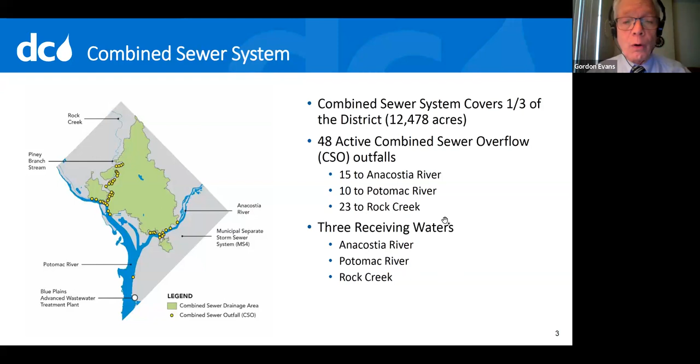That's an old style sewer, but that's exactly where the problem is that we're having to address here, because these combined sewers have overflows into these waterways, and these overflows carry untreated wastewater during wet weather events. So these are all being addressed in this project. We know there are about 48 of those overflow points in DC, and we're going to try to mitigate all of them as their flow goes into these 3 receiving waters.

This slide shows an illustration of the conditions on the Anacostia River before we started putting a CSO tunnel along the Anacostia. On the top, on the right side, you see one photograph that is a CSO discharge. That's a combined sewer overflow discharge to the Anacostia River. This is during a wet weather event. And down below is an example of trash on the Anacostia River. That's floating trash. That might be bottles, cans, anything that gets swept into the storm system and gathers here.

And so I'm going to guess that we've got maybe 88 people signed on here. If all those 88 people could look back on your experiences, I'm sure all of you at one time or another have used a garbage bag and cleaned up debris on the side of a river. And so imagine yourselves, all 88 of you, cleaning up this amount of debris that is shown here, and it's quite a large volume. And if you filled up all your garbage bags, that might be 100 or 200 pounds of floating debris that you would get in your garbage bags, and you would save it from going down the Anacostia into the Chesapeake Bay.

The reason I'm pointing this out is to compare it to another gathering of this kind of floatable debris later, an automatic method that we've got. We'll talk about that later. The upper left side of this slide shows 2 examples of combined sewer systems. The upper left is a sewer system during dry conditions, and the sewage is shown in brown, going its normal path out of a building into a sewer, and then being diverted to the Blue Plains wastewater treatment plant. That's normal flow during dry conditions.

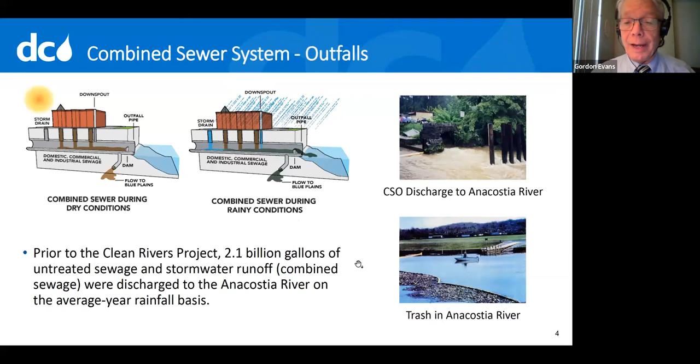Okay, that's slide 4. We're going to move to slide 5. So these are some examples of flooding that were recorded. Many of these are along Rhode Island Avenue, a very old and busy and important thoroughfare through DC. And you can see that we've had severe street flooding in that area, so much that some of these cars are nearly half covered. And so this is part of the situation that will be alleviated by this tunnel system. But again, Rhode Island Avenue, we're going to look at a map of where this is located and what's happening to try to mitigate this.

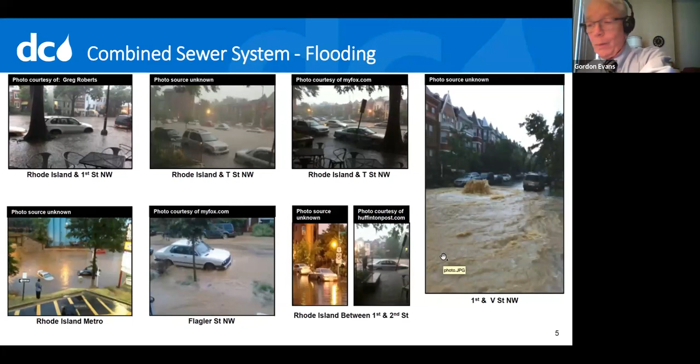Okay, moving on to slide 6. And here we've got another map of the district shown on the right. It's another rectangle, and it has, again, on the left, the Potomac River. That's the big blue line on the left. On the right side is the tributary of the Anacostia River, and along these rivers right now are an orange line, a purple line, and a yellow line. The purple line is a portion of the sewer that has been in place since 2018. It's called the Anacostia River Tunnel.

The orange line is the Northeast Boundary Tunnel. That's the portion that is just about ready to go online. We'll be talking about that specifically later. And then on the left side, the yellow line is the Potomac River Tunnel. That's the one where construction hasn't started yet, but it's coming. So these are the 3 main objects of our program here.

Also on that same map, in the upper center, is a bright yellow area with orange spots. That's the areas where green infrastructure is being used to mitigate some of the excess stormwater flow. That's not going to be the focus of this presentation. We're looking at tunneling only, but that is an important component of dealing with stormwater runoff here in DC.

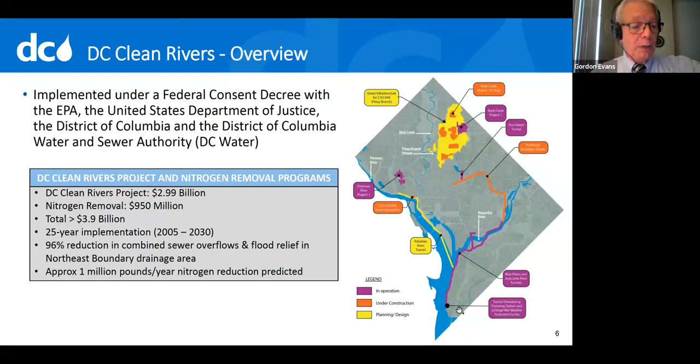Looking at slide 7, this is maybe a type of drawing you may have never seen before. This is a profile of ground. The tan color is the ground surface. It goes up, it goes down, and then down below is a depiction, a cross-sectional view of our tunnel. The portion on the left is colored in purple. That's the portion that has been in service since about 2018, and the portion on the right is in a tan color, and it is the next segment that's going to go in service in 2023. You can see that there's a slope in this tunnel from right to left, and that's by design.

When tunneling engineers, sewer engineers put these in place, they try to get a certain slope, which then renders a certain flow velocity. As the flow goes through here, that flow velocity, if it's high enough, will pick up all the debris in the invert of the sewer and carry it to the plant. So that's a kind of a self-cleaning mechanism that the engineers try to design into this.

Also in this profile are two dotted lines, one kind of in the center, and that's one dotted line that depicts 157 million gallons of storage. That's the requirement of the consent decree. And as soon as we get Northeast Boundary Tunnel online, we will achieve that. Above that line is a second line. It represents almost 200 million gallons of storage. And after this is all finished, that's kind of bonus capacity we feel we'll have in place. So we will have well more volume stored than we were obligated to have in the consent decree.

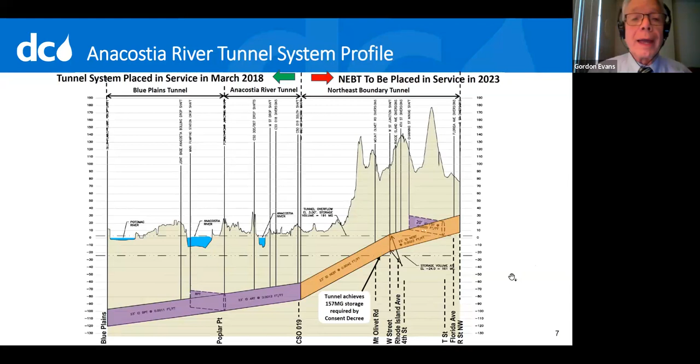Okay, moving to the next slide, which is slide 8. This is a slide kind of colorful with a graph in red and green colors, and what each one depicts is the amount of flow that our tunnel system saw in these various years. And in 2018, that's the first flow that our installed tunnel system saw. We got a huge amount of flow. That bar graph is up to 60.1 inches. That's way more rainfall than was expected.

And then the red and green colors depict: the green portion is the portion that was captured by the tunnel, but it was more flow than the tunnel could handle, so it overflowed, and that's what the red portion is. But you can see a minority of flow did overflow, and that was the case in every one of these years, 18, 19, 20, 21, 22, 23. The majority of the flow is being captured in the tunnel system, and a minority of it is being discharged untreated in overflow.

And then the bullet points on the left, these get to something we were talking about before. The first bullet: over 15 billion gallons of combined sewage has been captured between March 2018 to July 2023, a huge amount. Now the second bullet here, this relates to what we were talking about in the beginning. If all 88 of us were out with our garbage bags cleaning up trash along the river, we might gather 200 pounds of debris.

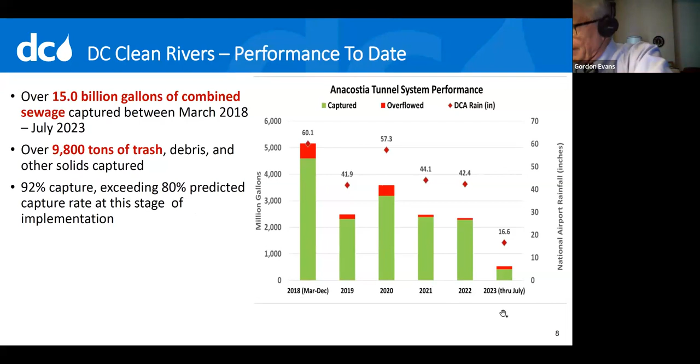Okay. All right, moving on to the next one, slide 9. Here's another map, this time of the Northeast Boundary Tunnel. That's what we're going to talk about specifically. The blue body of water on the right is the Anacostia River, and the portion that's along here is about where RFK Stadium is, if any of you kind of remember where along the Anacostia that is. And this brown line here is the path of the Northeast Boundary Tunnel, and the upper portion of it, the diagonal portion, parallels Rhode Island Avenue. Remember, we saw those photographs of flooding along Rhode Island Avenue.

Each one of these red dots or circles represents a diversion structure, and that enables the surface water to be diverted into this very deep tunnel system, might be 50 to 120 feet below the ground, and gets it off the streets. That's the whole purpose of this tunnel system. So you can see we've got several of these diversion facilities along, especially Rhode Island Avenue, and then other places.

Down in the bottom left is a small detail of what a diversion structure looks like. We'll look at a bigger version of it later, but in essence, it's got the tunnel, which is down below 100 feet below the ground, and then above on the surface is the diversion structure that sits astraddle an existing sewer, and whenever that sewer gets too full, the flow is diverted and drops down a shaft and goes into that tunnel system.

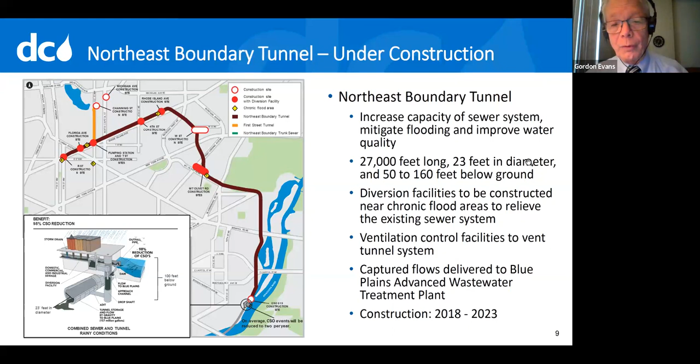Okay, moving to slide number 10. This is a typical construction site. And in the bottom right-hand corner, you can see how crowded it is trying to build anything inside crowded DC. So this contractor has a triangular shape here. He's crammed everything possible into it.

And then after construction, you can see the depictions on the upper right of what this site will look like when he's finished. It will be a very welcoming park setting, and so the people in the community will probably have no idea what's down below, but they'll appreciate this triangular park they've got. On the left side is a plan view of a typical facility. You can see the aqua colored sewer coming in from the upper right.

It intersects a circle in the middle of the site. That circle is the shaft that may be 50 to 160 feet deep, hits the shaft, and then adjacent to this structure is the diversion facility. That's the rectangular feature on the bottom. It sits astraddle the green sewer line. And then at the hypotenuse of this triangle is the ventilation control facility. That's the one that lets the air exhaust out of the sewer as it's filling up.

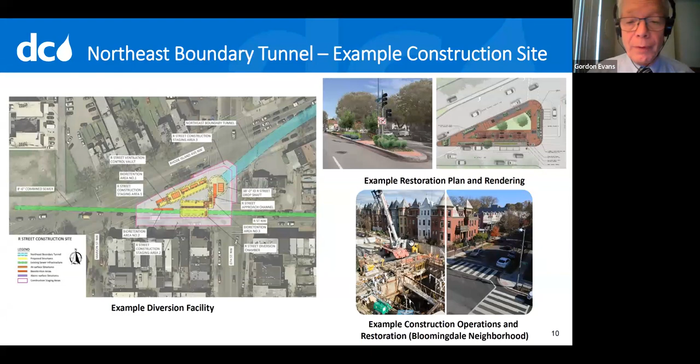Okay, moving to slide 11. Here you see more detail of a typical diversion facility. You see the tunnel down below, and then up above, you see the diversion facility sitting over the top of a sewer. And whenever the sewer gets full, the flow is diverted down a shaft and into that tunnel.

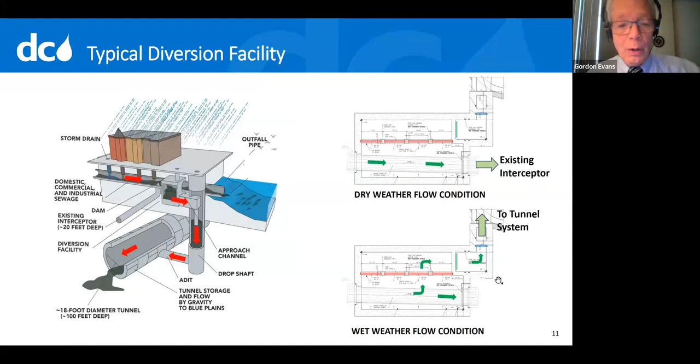On the right side, you can see two details of what one of these structures looks like during dry weather. The flow goes straight through the green arrows there. And then during wet weather, the flow gets so much that it fills up and it crosses this red line here, which is a weir, and that's kind of the boundary into the next facility.

This slide 12 is a slide that deals with probability. This graph here over on the right is labeled flood relief, and each one of these columns represents a type of wet weather event. The first one is a 1-year event, then 2-year, and then 5-year, 10-year, 15, 25, etc. So the frequency of these storms varies. It diminishes as you move from left to right.

So designers, when they design a stormwater project, have to pick a point that does give the community some relief, but the community can also afford. The level of protection that the designers chose here is about a 15-year storm. So you can expect a pretty good amount of protection up to storms that have a frequency of about 15 years, but storms that occur every 25, 50, or 100 years, you're going to get some relief, but you're guaranteed some flooding. So this is the decision that designers make when they are designing a system like this.

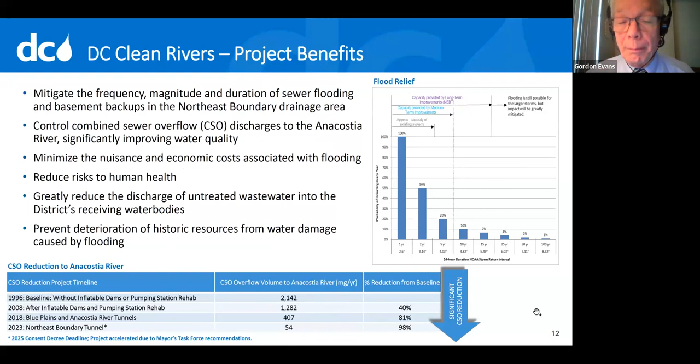And this first bullet point on the left is the essential one. This mitigates the frequency, magnitude, and duration of sewer flooding, and all these other benefits derive from that. Down at the bottom are some points. In 1996, this is the volume of the flow that went out to the river when there were no features to block it: 2,142 million gallons, that's 2.1 billion per year, excuse me. And then all the way down to 2023, when the Northeast Boundary Tunnel is online, it will drop down to about 54 million gallons per year, a huge decrease in the flow.

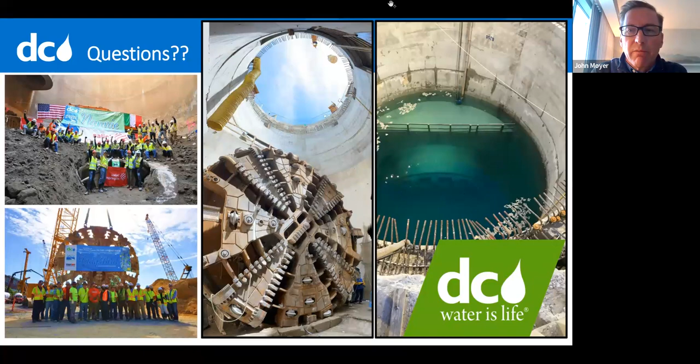They're already coming in. One question for you, just to understand a few things about project management at this scale. A lot of us have been involved in construction projects, but nothing in the $3 billion range. Give us an idea: what kind of human resources are involved? How many people, what kind of disciplines? I can imagine all kinds of engineers, construction and operations. What's the scale of the people that have been working on this thing?

Well, John, it's a small army of people, and they start 2 or 3 years before the actual construction begins. And some of the most important people at the beginning are specialists who are kind of a subset of civil engineers, called geotech engineers. And once a route is selected, they will do borings along the entire 27,000 feet of the sewer route, the tunnel route, and they'll make reports on what is down below, how deep the water is, if there's rock, if there's sand and gravel. So that's one of the big components.

So that's the geotech engineers, and then other engineers do other components of it, and put a design together. The way we bid these is design build. So we put out a partially designed project, and then these tunneling contractors are competent enough. They know how to tweak the design and give us our maximum value for our dollars. But it's quite a few people, John.